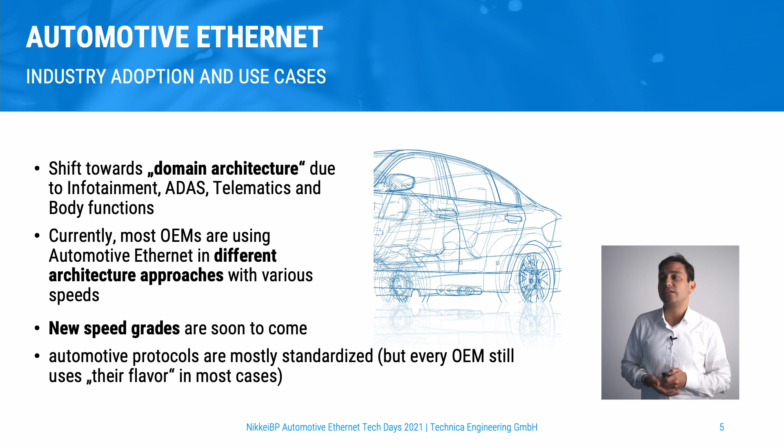With the new speeds that are soon to come, we can all expect to have major changes in the architecture structure. Many new ways of architecture will be possible now. And one important thing to remark here in the history of Automotive Ethernet implementation is that every OEM pretty much uses every protocol in their own flavor, let's say. Every OEM ends up using UDP-NM, DoIP, SOME/IP in slightly different ways. This is important to point out because when it comes to testing, which is what this talk is about, that is quite relevant. So let's go to the next topic, quality requirements of data transfer systems.

I think talking about Automotive Ethernet without remarking on one of the technically most important topics would be incomplete. You have heard this many times, but I would just want to point it out again. Why do we have Automotive Ethernet? It's because standard Ethernet, 100BASE-TX, Fast Ethernet, cannot be used in cars because the EMC emissions are not compliant to the automotive requirements.

You can see in this graph, this is a measurement from Technica Engineering. Maybe you have seen it in the Automotive Ethernet book from Dr. Matheus and from Thomas Koenigseder, or maybe in other papers. This was done by us many years ago. The green line represents the maximum allowed emission level of the stripline measurement for EMC, and the red line represents the stripline measurement of the EMC emissions of Fast Ethernet.

And as you can see, above 10 megahertz and all the way to roundabout 120, 130 megahertz, the emissions are above the allowed level. This causes disturbances in communication systems such as CAN and FlexRay, which makes this technology useless for automotive purposes. When it comes to the solution that today is known, standardized in 2015, but started back in 2009, BroadR-Reach, of course, is within the limits. One of the requirements that's essential is EMC.

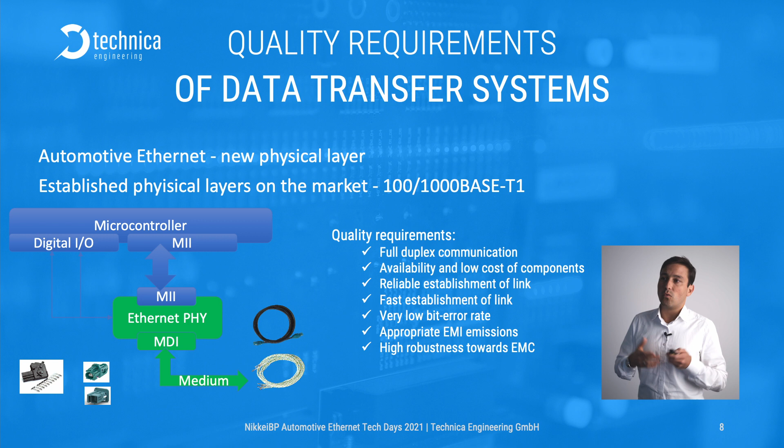And other requirements you can see in this list are quite a lot. I don't want to go through all of them, but this is very important to point out when it comes to data communication systems, and many things can go wrong. That's why I'm showing the next slide. When it comes to things that can go wrong, the PCB might be wrongly designed or the wrong components might be used. In this case, we have an example of the measurement of 5 devices, which we have measured in terms of establishing the Ethernet link.

This is an old measurement. We have shown it at the OPEN Alliance, at the SAE, and different places. And 4 of these 5 components have mistakes, highlighted with the blue bars over here. 4 of the devices have link establishments that have taken more than 100 milliseconds. On the x-axis, we have the logarithmic scale for milliseconds.

And we have in red the aggregated number of measurements for the number of links that were established. We did millions of measurements here. Even with the little red circles, you can see on the right side, 2 of those had multiple times where the link was not established at all. So essentially no communication. That obviously is unacceptable in the car. And only one of the components here has link establishment within plus minus 100 milliseconds, which is necessary.

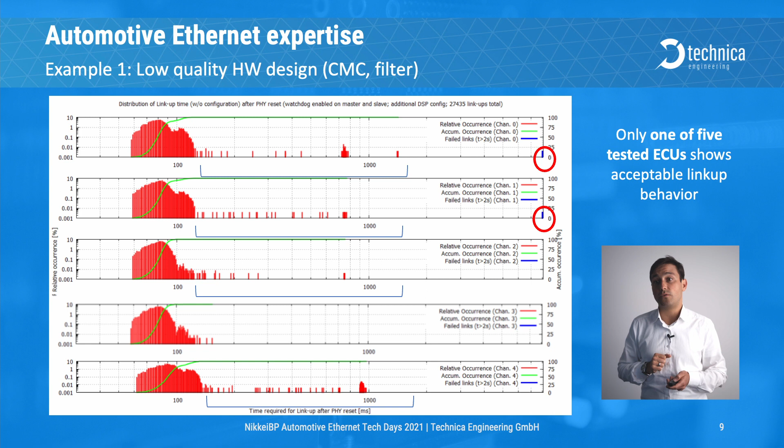What we're trying to say here is hardware design and choice of components is super important. That has to do with the requirements for data transfer systems. So now that we have touched on the history of Automotive Ethernet, what Technica has to do with it, and what requirements are there for data transfer systems, let's go to testing considerations, some strategies and concepts.

First of all, there are 4 holistic steps that need to be considered when testing. And in the automotive industry, the V model for development is a very good benchmark. I will touch on this in a second. Then the OEMs need to have a proper test concept and test specifications for this technology. Some of them exist through the Open Alliance, but obviously for the EE architecture of every OEM, they need to be adjusted and adapted. Then for every step of testing, you need different implementations.

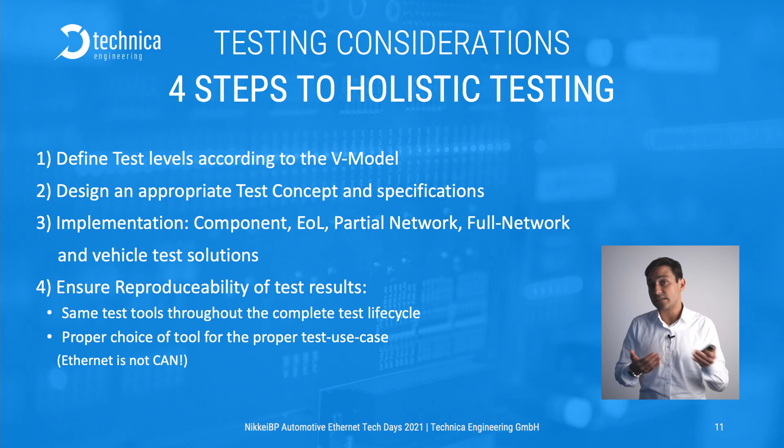So you need component level testing, you need system level testing, full network testing. When you finalize, this is more for the tier 1s, when they make the components, they need end-of-line testing, and obviously you need full vehicle testing. And each of these testing strategies have different requirements. And then what Technica recommends here, in order to ensure the reproducibility of test results, which is extremely important from the beginning till the end, is the choice of tools and the use of the same tools for the same test purpose. So let us talk about this for a second.

On this slide, you have the V model simplified as everybody knows it. On the left side, we design our system from more abstract to more precise. On the bottom side, we develop and we integrate the different software components, also electronics and mechanical components. And on the right side of the V model, we talk about integration and testing. So on the bottom side, once your software integration takes place, there are continuous integration and different unit software-based tests that need to be done. These need to be repeated, so an automation system needs to be put in place.

Then when the components are available, there are gray box tests, which are very important to be able to have a debugger and at least have some information of what the ECU is doing. You need to consider functional safety, AUTOSAR, functional requirements to be tested. So here you still need software in the loop, but you integrate things like hardware in the loop. Then when the components themselves are partially tested, of course, the tests continue throughout the whole life cycle.

Now you start to get different kinds of HIL systems where you test the system integration, where you're mostly looking at black box communication, so what happens between the ECUs. So you need different kinds of test systems here and different kinds of test benches. Then you go to the system test, where you see the whole system, all the components are connected together. And here you have different requirements of the testing framework and the hardware and software. And finally, vehicle test, where your test systems need to cope with things like battery management, temperature, things like this. So that's, let's say, to follow the V model.

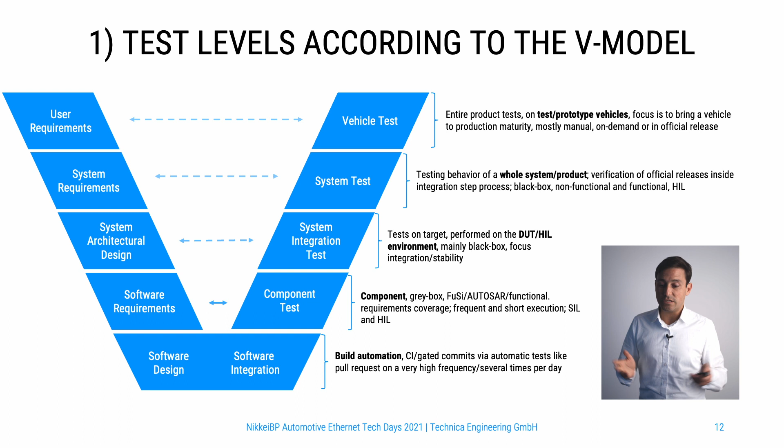On point number 2 that I mentioned, for each of these steps you need an appropriate test concept, and obviously you need appropriate test specifications, which need to be adjusted to the EE architecture of every OEM. Now, on the implementation phase, when it comes to component test, it's important to consider the multitude of protocols. This is completely different to what the OEM is used to when it comes to LIN and CAN. Most OEMs have already realized this.

Here there's a very quick presentation of multiple protocols in Automotive Ethernet. In black, some IT standard protocols that already exist. In pink, peach, other protocols that are more automotive specific. In things like gPTP, which is for time synchronization, there's a specific profile for automotive. Some of these test cases you want to test in a test house. For this, the Open Alliance TC8, the technical committee number 8, has specified some test cases for physical layer, for different kinds of protocols. You might need some specific tools for that.

I'm showing some of our partner companies over here. Then obviously you will need, for the component tests in your different stages of testing, different kinds of hardware-in-the-loop test benches, depending on the complexity of the ECU.

And what's important to mention here, what Technica has realized, is those TC8 test cases and all of those HIL tests that look at the functional part are not covering the non-functional aspects of the quality of the implementation of the protocols. For this, we have realized with multiple OEMs, we have successfully provided so-called Ethernet test suites. That's the name we put it. It's very generic. So these are specific tests to look at the proper implementation of the protocols on the ECUs upon every software release. This has to be tested.

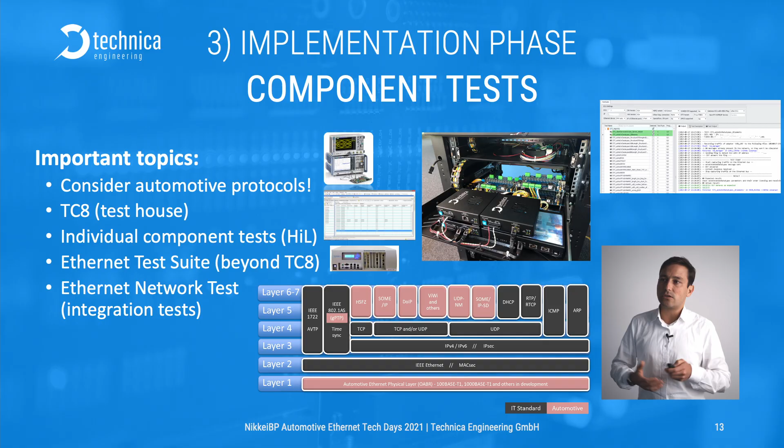In here, I want to present you just really quickly how the test suites can look like. This is just a very general, broad example. There may be different levels of test suites with different numbers of test cases. So you might want to have what we call sanity checks. So just a few tests to see whether the ECU was properly flashed, whether it's communicating properly.

Then you want to go to a little bit deeper tests, the so-called pull request test, where you have a couple dozen maybe, depending on the complexity. This takes obviously different amounts of time. You can feed back to the developers how things are going. Then we have other strategies like the nightly tests with a couple hundred test cases. And when this software proves to pass most of the tests, you can go over to weekly tests where you have thousands of test cases to execute.

And then if the software and the hardware combination is proper, meaning there's not so many errors along the way, the developers don't have to provide too many bug fixes, then you can go to full validation or complete device validation, which will take up to tens of thousands of test cases. Just to give you a feeling on the test depth.

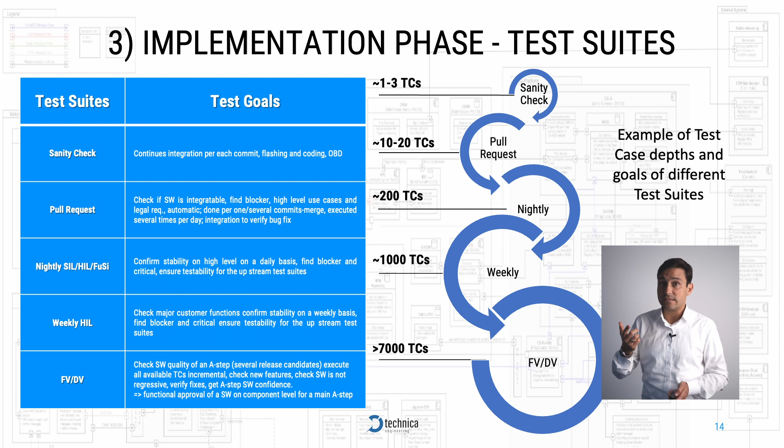When you do partial network testing, you need maybe something more sophisticated. You don't want to stimulate so much, you want to look at the traffic. So for this you need proper measurement devices that will be able to capture your data, give you timestamping information, give you reliability information on the quality of the cabling, the signals, counting packets and so on, counting if there are errors on the CAN, on the Ethernet and so on.

And then you want to go to full network tests where you have all of the real components of the car connected together, and here you might want to put partially simulation of ECUs that are not present or that would normally be working differently in the car. And finally, you want to do full vehicle tests. Of course, I cannot show you pictures of this because it's all NDA protected, but you can imagine a whole car and you want to capture all of the traffic in there.

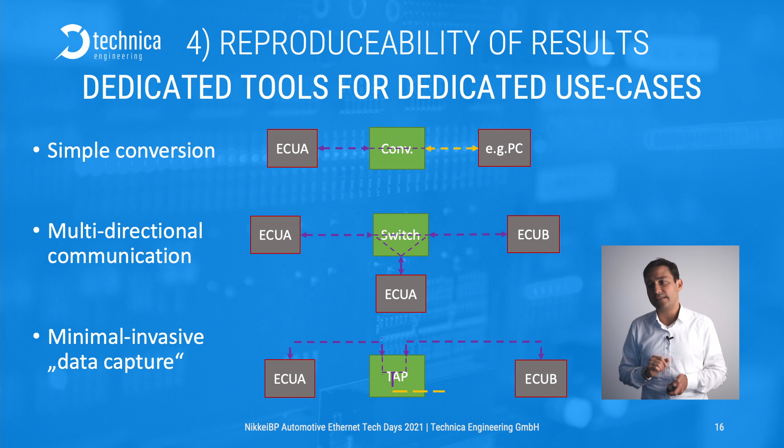So, summarizing, for the 4 steps to holistic testing, as I mentioned before, following the V model, every testing level requires different test racks, let's say, testing concepts. Hardware and software framework have to be adapted. A proper test concept must be developed in itself by the OEMs. This is responsibility of the OEMs.

And the test specifications, even those that exist, they are there, but it's not enough for the EE system of every OEM. On the implementation of the test benches, I have shown you some of the examples, but nevertheless, point number 4, you need reproducibility of test results.

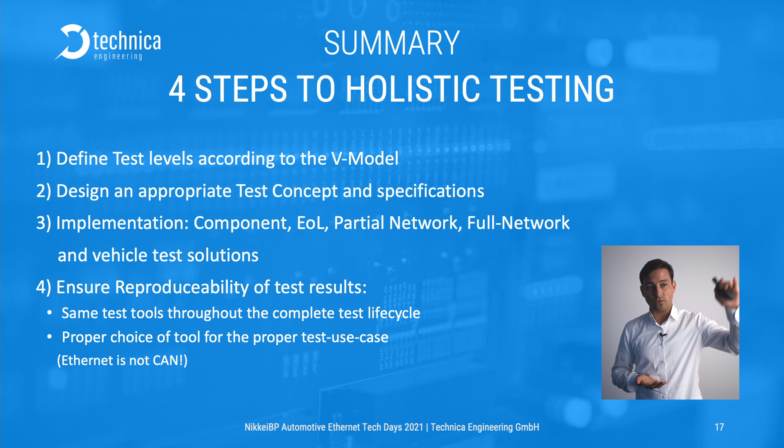So for a specific use case, it's important to use a specific dedicated tool that will be reliable, that will be properly implemented, and will give you the results you need, and use for that use case throughout the whole V cycle always the same tool.

Link establishment, which is crucial. If you don't have a proper link establishment, the whole thing doesn't work on your measurement tool. This is extremely important. Deterministic latencies, especially in the taps, as I mentioned before. Otherwise, when your network has measurement devices, it will behave completely different than when it does not have the test devices. With our tools, we have found out this is necessary, this is important.

Power range, when you're in a car, maybe you need 24 volt, but generally 0 to 12 volt. And when your battery goes down to 8 or 6 volts, it still has to work, very important. Full throughput of the data, which you have to test for 100BASE-T1, 1000BASE-T1, with big packets, small packets, and a mix of that.

Diagnostics of status, what is going on with my tool. Startup time, does the tool start up before the ECUs? Wake-up concept, do the tools go to sleep? Can I turn them on? Will it be fast? Ease of configuration, because we have seen many delays in projects because the configuration was not right. Can I check the configuration after the fact?

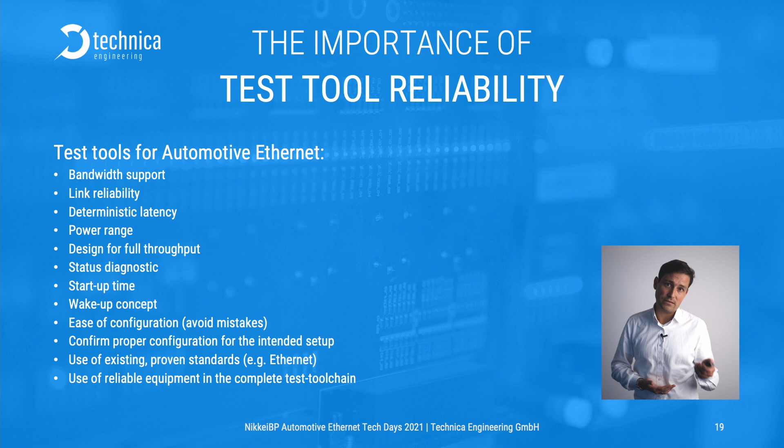Using existing standards, especially when you want to be compatible with multiple tool vendors, like Ethernet, yeah, RJ45, everybody can use that, and use reliable equipment for the complete test tool chain, because we have seen the use of, let's say, loggers that were not really that good and they lost packets, and that's a big mistake not to have the right tools.

All right, so with this list being said, what happens if not? Well, if you lose packets on your measurement system, you find mistakes that are not on your test system, they're on your measurement system. So the tools cannot have something like packet loss. If you have logs of received data that is not synchronized, you don't know when the data came at what point, this is not acceptable.

If you have incomplete data because the message throughput was not there, because there was a manipulation of the data, then this is unacceptable. When you execute your tests and your measurement system is not starting fast or is not performing the right way, your automation will fail, and this is also not acceptable.

And the most important topic is, if your measurement system is not reliable, you will lose time. The whole testing will be inefficient. The whole project will take a lot longer, will cost a lot more money, and the results will be delayed, which is in the end bad for everybody.

So, going to the last point, overview of the best practices of test solutions. Today I want to highlight this concept. So you can see in this animation we have 5 so-called capture modules and 1 so-called enhanced Ethernet switch. This is a concept of distributed testing system which fulfills all of the requirements of testing tools.

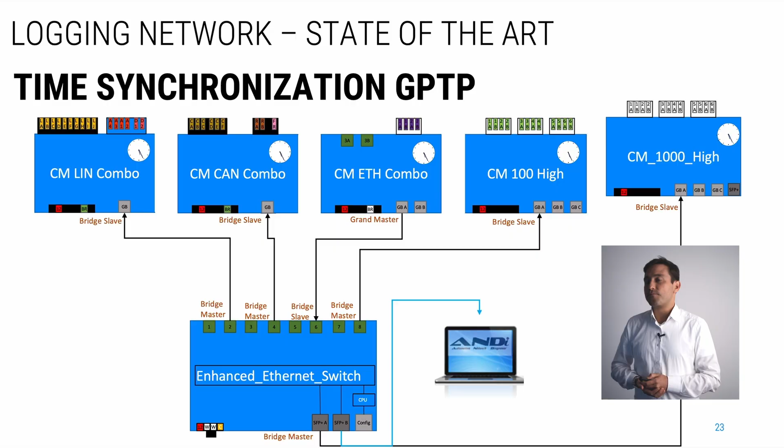And now, as is stated in the abstract of this presentation, which is one of the highlights, I want to go to the protocol that is currently being standardized by ASAM. There's an international standard looking at the transport protocol that is used for CAN, LIN, FlexRay, RS-232, Automotive Ethernet, SerDes, analog or digital values that are captured from the communication inside the car, from ADAS, from infotainment, from telematics, from the body, from backbone, everywhere in the car, and funneled, or let's say summarized, into Automotive Ethernet.

And then in that Automotive Ethernet packet, you need to have some way to identify what data is being transported there. So we have developed a protocol called Technically Enhanced Capture Module Protocol, or it's equivalent to a protocol of one OEM that's called PLP, Probe Logging Protocol. And this protocol is free and open for everybody to see, and now it's being currently standardized by ASAM. It provides the metadata that is needed to identify timestamps, counters, and so on. I will show this in a second in more slides.

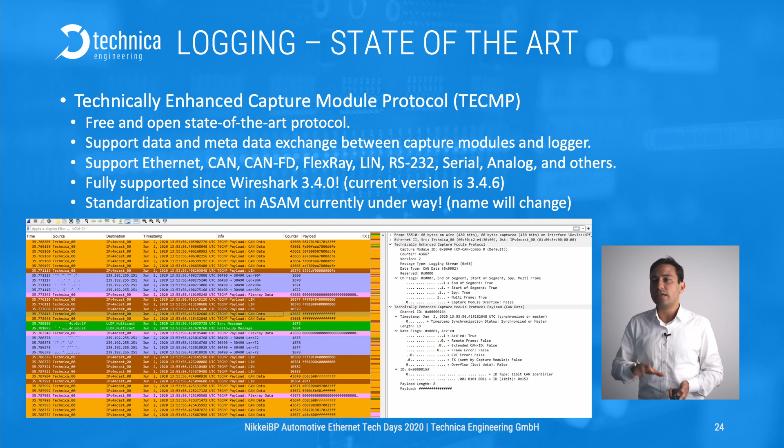And open source tools that are used worldwide, like Wireshark, which is the most widely used tool in the world to test communication protocols, support it natively from version 3.4.0. Now, in the standard, obviously this will change a little bit, but we will provide the Wireshark support for that as well. So how does it look?

So what do we do here? Essentially, behind the VLAN and the initial EtherType, we have a TECMP header. By the way, the protocol standardized via ASAM goes under the name PLP. The final name of the protocol might be completely different. This we will see.

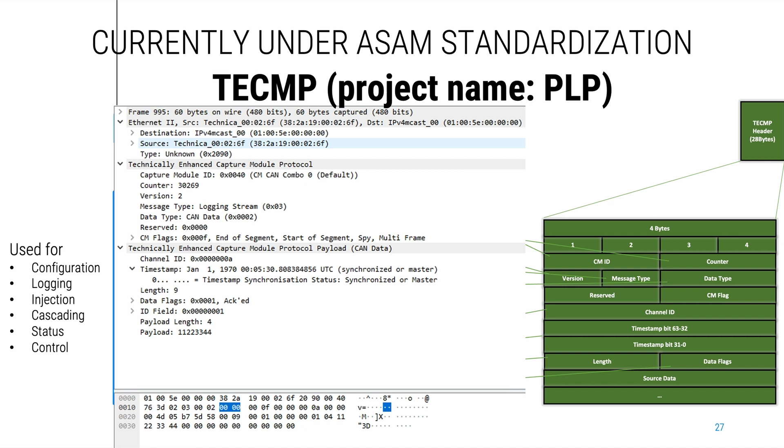You can see the header in general with all the aspects that I mentioned to you, and then the payload, in this case just one CAN frame in one Ethernet message, but obviously there's also packetization, so you can put many CANs or many small Ethernet frames behind and put them all in one Ethernet packet. That's it about TECMP. If you have more questions on the standardization, you can ask us later on.

Just one aspect I want to really remark on: the data logging, the sink, whatever storage system you're using to capture your data, is also potentially going to be the single point of failure, just like it is in every communication system. The problem number one when it comes to network issues is that the buffer of the receiver gets too full. So in this case, it's really important to remark you might want to have some buffering features on these kind of devices, which is obviously something we offer, in order to take care of spikes when it comes to the traffic.

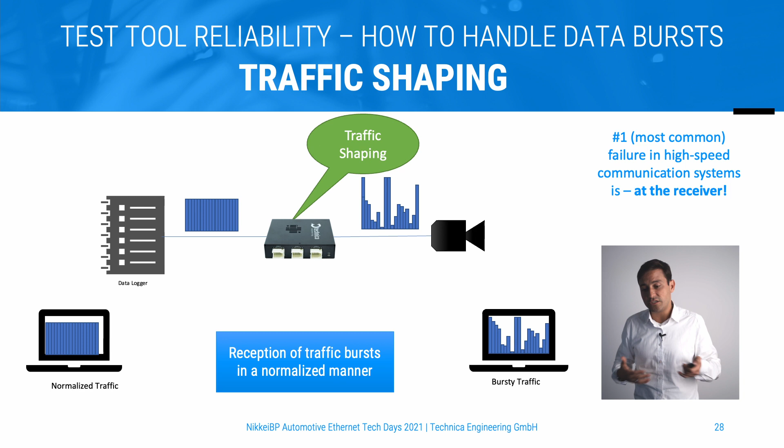In this case, you could even use simple computers. For many use cases, when the average traffic is small enough, you could even save money and space, and you don't need a logger for many test benches if the average traffic is low enough for the computer to capture. This might be really important on many of the test benches that I showed before, because it all becomes cheaper, faster to implement, and easier to use.

So, in summary, I have given you some information of where Technica Engineering comes from, what it has to do with Automotive Ethernet, what are the quality requirements in general of data transport systems, what test considerations we have found out are most important when it comes to testing Automotive Ethernet systems, what key aspects are relevant for any test tools when it comes to reliability, and an overview of the state-of-the-art solution that we have for logging. Obviously there's many more things to talk about, best practices, but this one remarking the standardization on the ASAM protocol of TECMP.